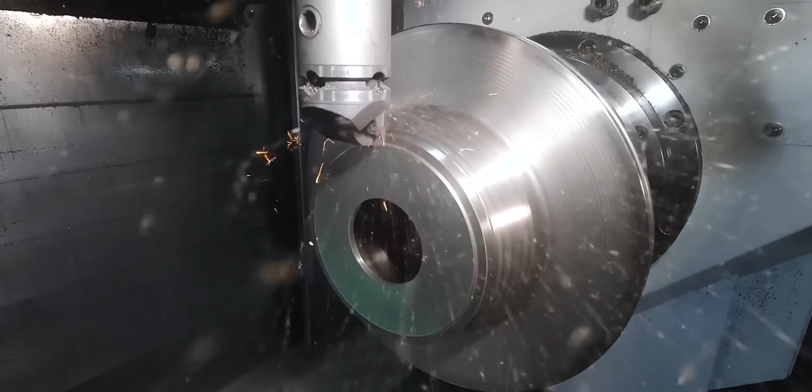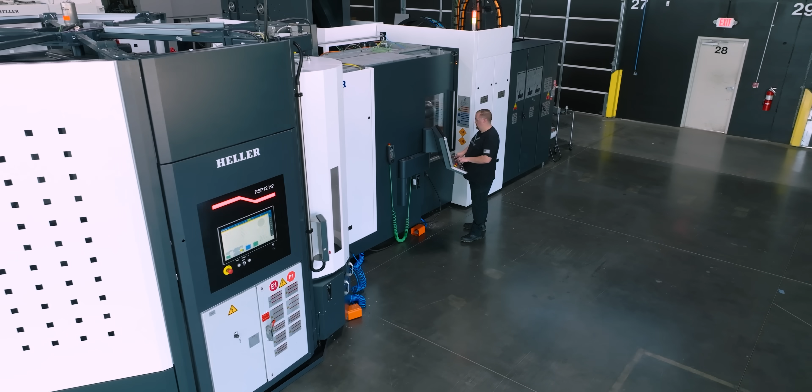When I was up there speaking, I said, who programs? And all these hands went up. And I said, not a single one of you are the same. Everyone programs based on their experience, their applications, who they've known, the type of machine they're on. Everyone's different. Therefore, if one company switched out each programmer on the same job, that cost would be different because every single person's different.

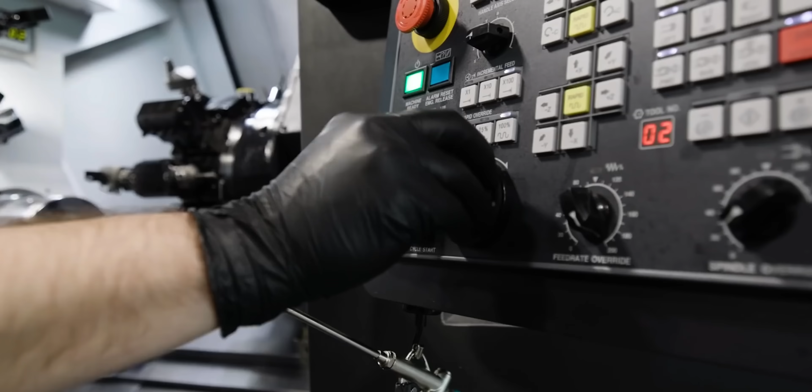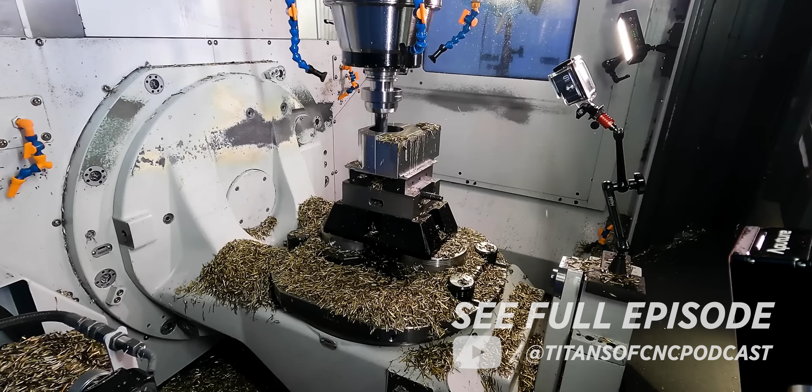So one of the biggest and most important things you have to understand as a company producing a part that matters, and you need to get time down, is who is your programmer? What is their mentality? What is their mindset? Are they striving for just being obsessed to keep perfecting the art, and keep getting better, an obsession for perfection?

That's right. You know what I mean? I love the way you say that the programmer is the one that dictates the pace of the shop, because 100%, that is so true.

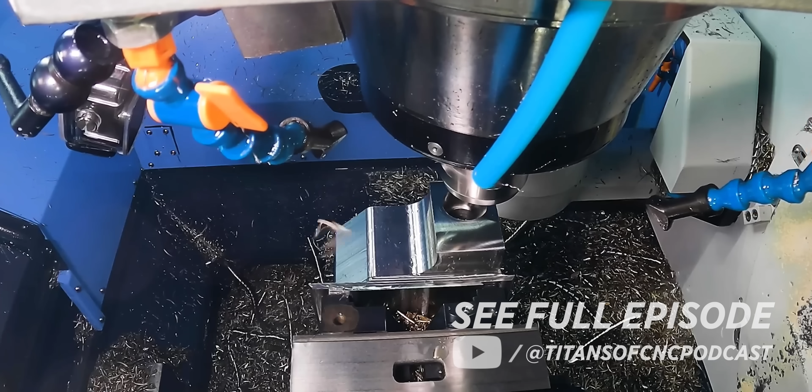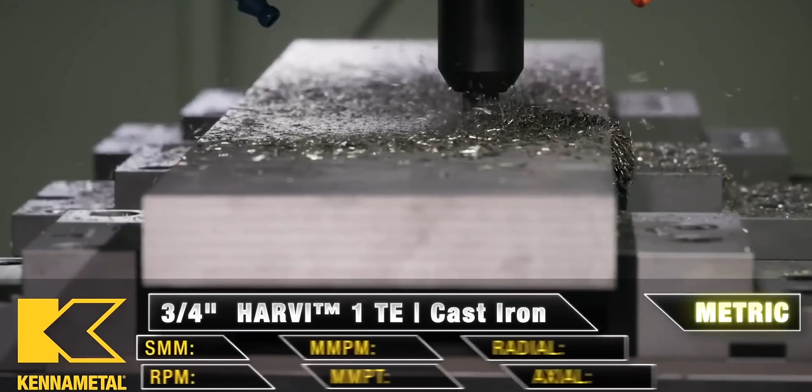Yeah, it's like if you walk onto a floor that's making a million dollars worth of product, there will always be an alpha programmer. There'll always be one guy that started there at the beginning, or gained the respect from other people, or however he got there. But that person is the one that dictates it, and other people are kind of underneath that person if there's many different programmers.

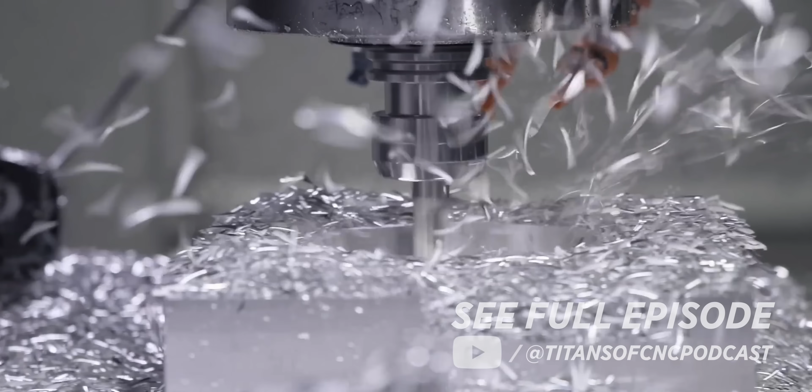And if that person is amazing, the entire floor will be amazing, so long as they have good documentation, they understand how to do standards, and everyone else kind of rises to that person's level.

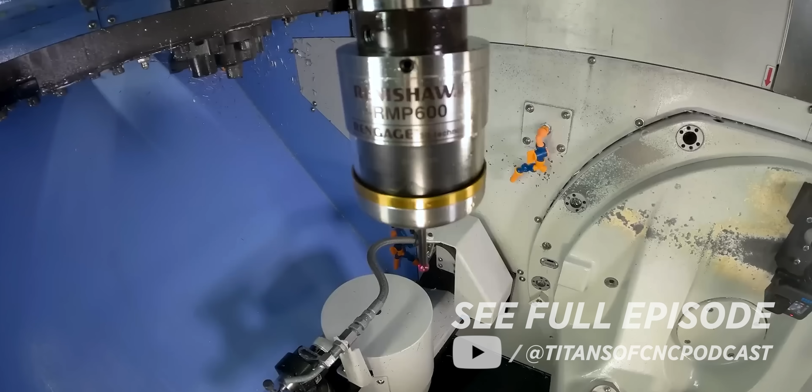But if it's like a zoo, and you have different people running different tools, the same tool in different ways, like you guys were talking about, and it's all in disarray, then you're going to have major problems. But you bring in the right person, and that person will be able to look at everything.

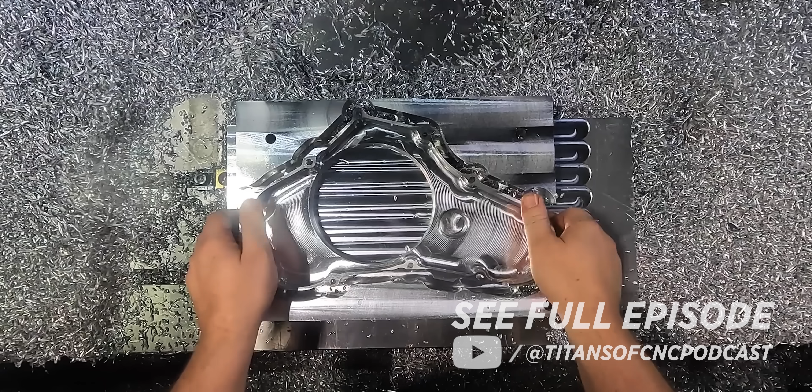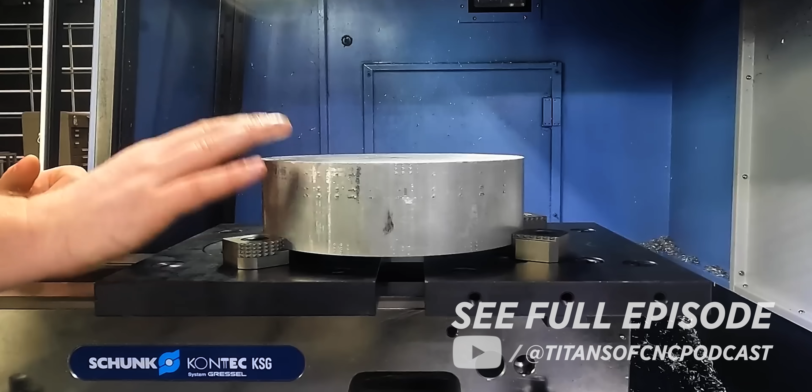By just adding certain standards, not just standards in tools, but in surface foot, chip load, depth of cut, all of it for each type of material and application, by adding these in and making it law for all programmers to do the exact same thing, or bring something that's better to make that the standard, then the entire company will rise, because the price to manufacture the parts will decrease, which gives you a better profit, which allows everybody to get paid, which the culture will get better.

It changes everything. One person. And if your head programmer does it the same way and he's not willing to change, then that person needs to be fired. I'm sorry for anybody, but I've literally gotten people fired over this.

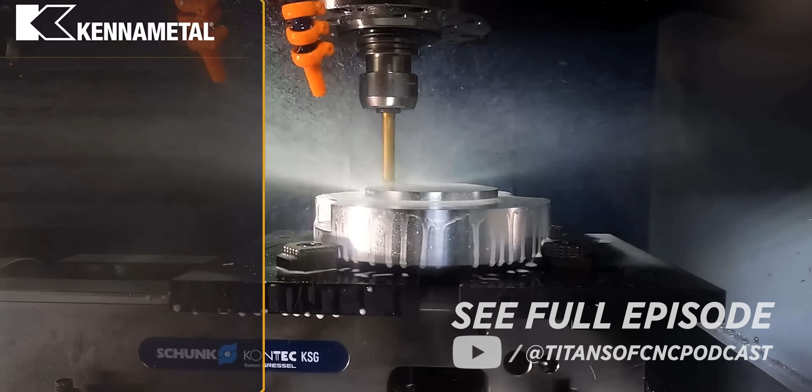You have a whole company that's staking everything on your decision making. And if you're not constantly striving to be better, if you're not a true leader and you're not bringing the heat as far as making everything flow perfectly, then you should not be in that position.

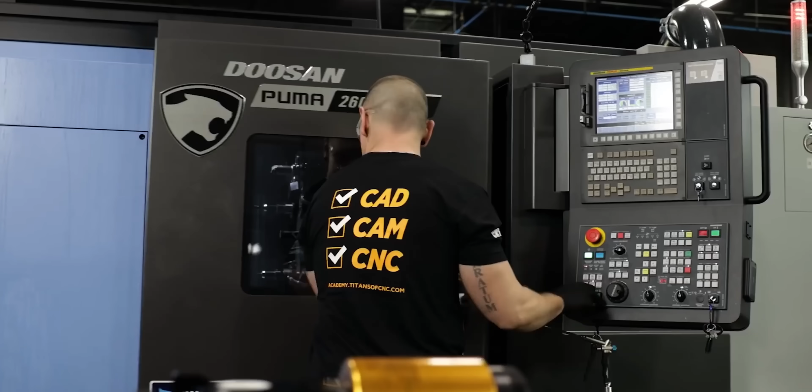So good. It's funny, it's like there's really this kind of balancing act, because you want to be consistent, you want to develop standards, you want everybody on the same page, but you also have to be able to step back, look at the situation, and be willing to innovate. Like you say, if somebody comes with a better solution, you have to be willing to look at that and perhaps give it a chance.

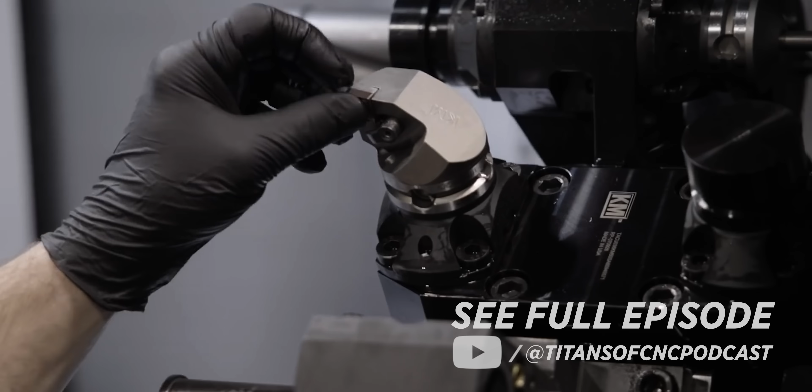You have to be willing to change at the same time. And sometimes, if a job's running forever, you don't want to just stop the machine, let it blink, and go put in the end mill right there.

That's why it's important to, after work or on a Saturday or something, throw like a little test party, and be like, hey, we're going to actually take some monster cuts, we're going to murder some material, and we're going to see what these things can do. And if we can find something better, then we will go change the original programs that are running on the machines and make that law.

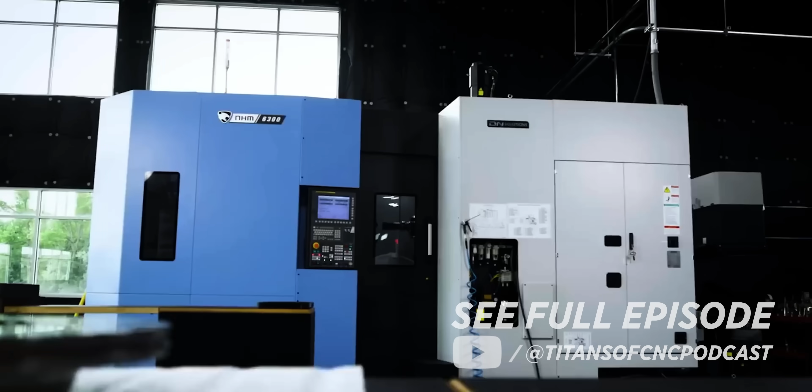And usually it'll blow your mind too, the results. I mean, think about how many tests we've done, and it's like, holy cow, we've been leaving hundreds of thousands of dollars on the table and didn't even know it.

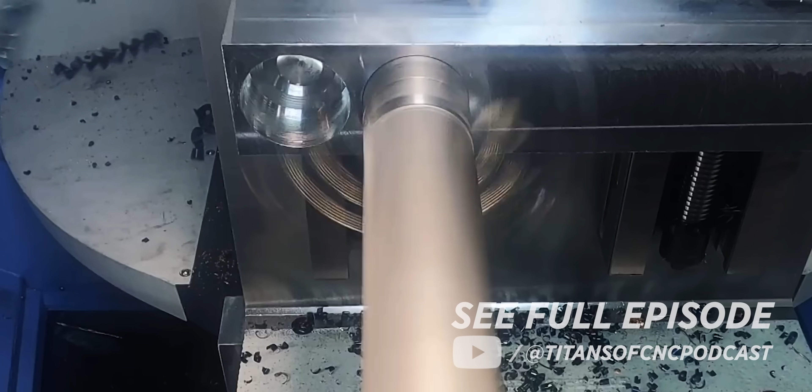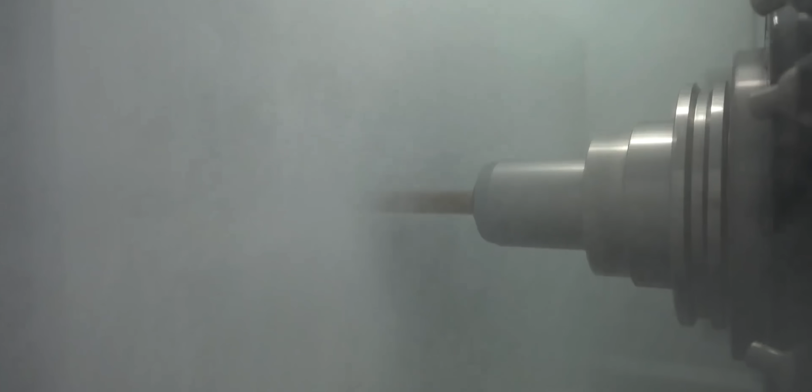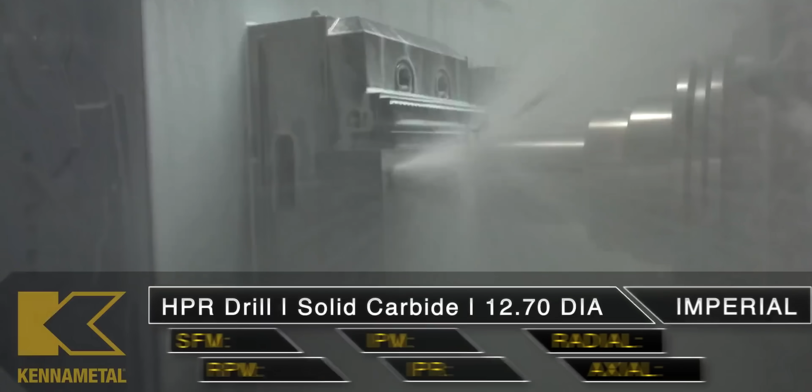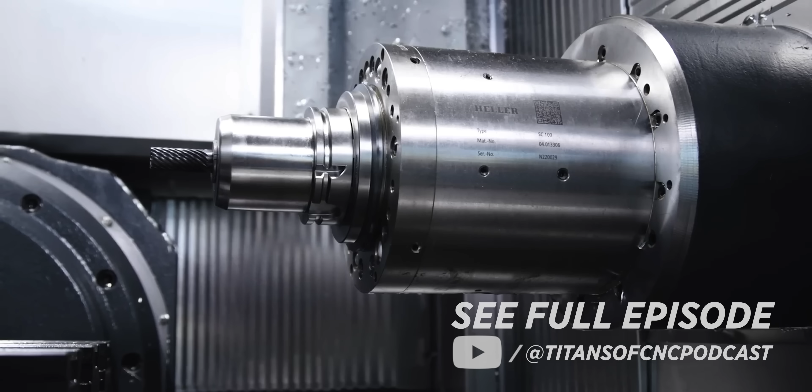And then they're just taking these small pecks and drilling so many holes, not thinking that you could actually go to one of the higher end drills that are designed to break the chips and designed for that specific material. Like Kennametal has some of these drills for steel. These things are running at like 100 to 200 inches per minute in steel. Or like us, 2,300 inches - that's on the end mill, but on the drilling, it's just like boom, you know, just murdering it.

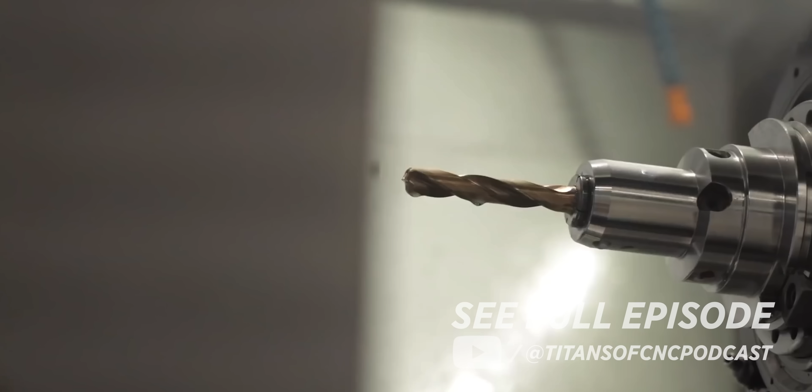I love new tooling and I love innovations, and people a lot of times don't realize how much money those things can make you if you're open-minded and you bring them in.

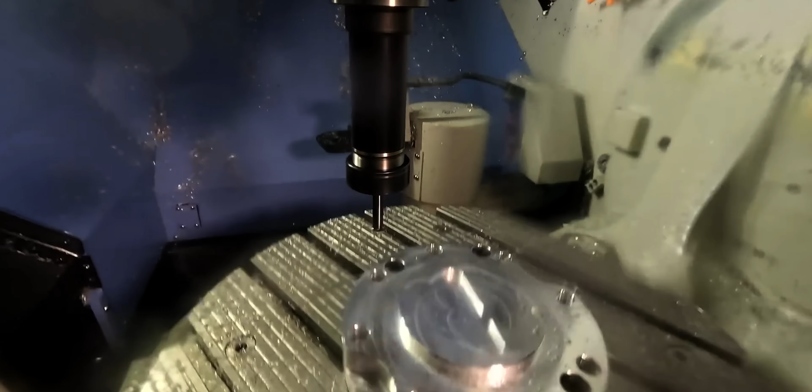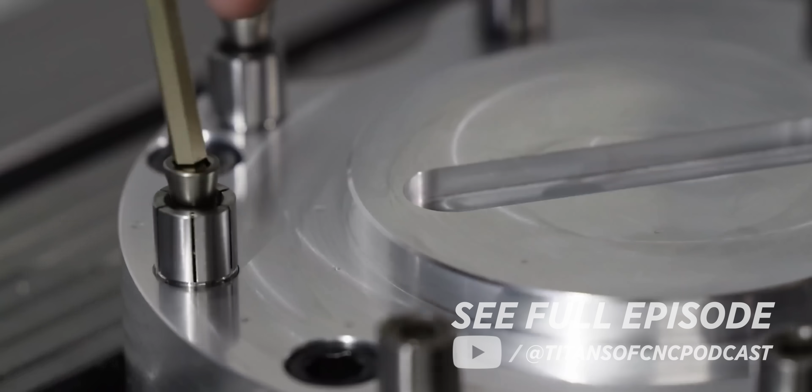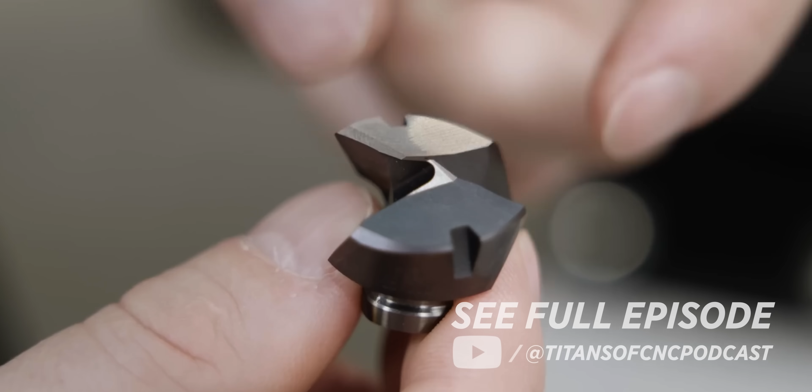Well, that's where it starts, right? Being open-minded, because I'm living proof of what you were just talking about. I'm not saying I was that alpha programmer you were talking about, but I was asked to do a process document for tight tolerance parts. So I had to write up the procedure that we do, because a lot of the parts I was getting were those tight tolerance parts, and they were generally coming out good, but we'd hand the same type of stuff to another programmer and it might be a completely different process. So I was asked to create a document, take your processes and some of the other programmers' processes, and let's create this document so every programmer follows it. Like if you're doing this tight tolerance hole with a 3-thousandths true position, this is how you do that hole.

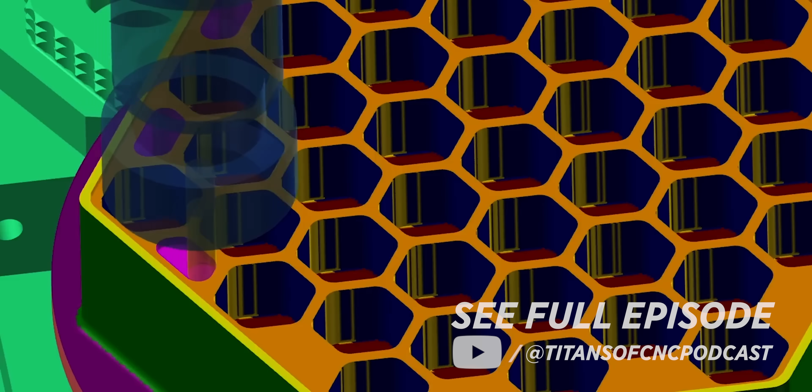And it made things so much better once we had that document in place. You can get a lot of different variants, even from your programmers, down to your setup guys. If you have a difference between your setup guys who do your tool hang-outs, fixturing and stuff like that - I had to write up several process documents for setup techs too, like on the lathes, making sure that if you hang a boring bar out a difference of 1.5 inches, that can change your entire program. It changed everything. Now your program is no good, and now we're going and changing your program when it wasn't the program at all - it was just how you set it up.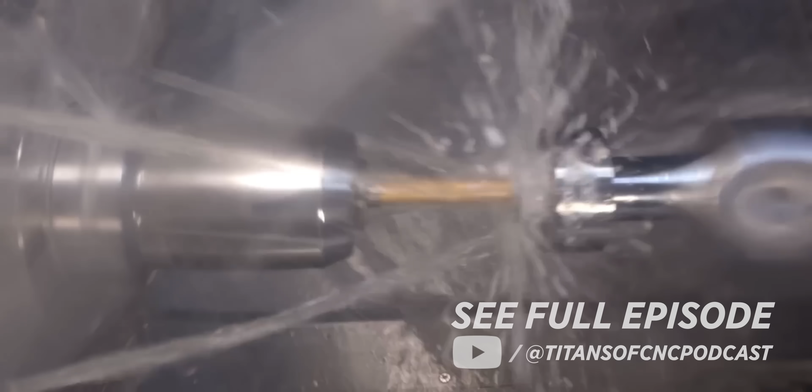So you want to see that consistency all the way down, right? From your programming to your setup to even your operators. That consistency is key, 100%. And it's not just good for the company, it's good for every machinist on the floor - they know what to expect, they know what to do. Exactly. Everybody gets in that same rhythm and groove, and you start making real money when that happens.

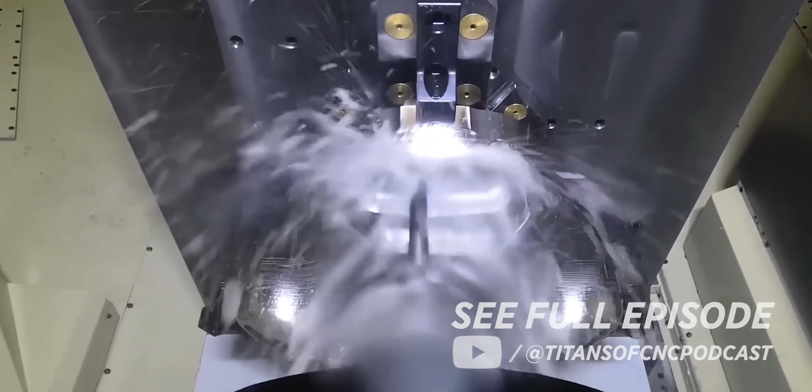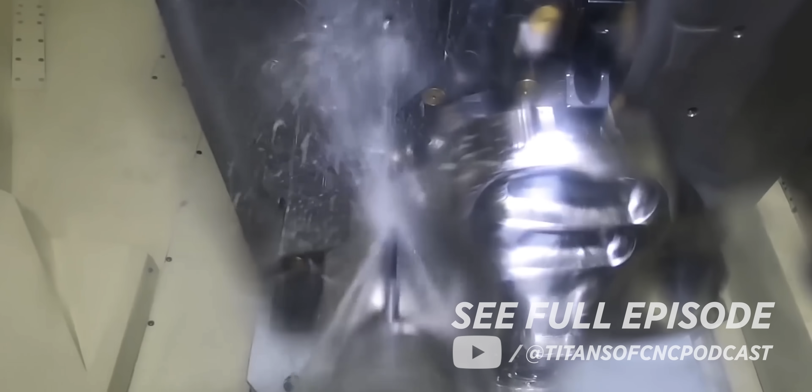So I think that running tools is something every shop should look at - figuring out your standards, figuring out how to push them, getting to that sweet spot, standardizing it, then allowing all your programmers and machinists to run off the same standard unless they have something better that is tested and proven and replaces the current standard. So when you get to that point, talking about ways shops can improve - advancing your programming techniques, your tool path techniques is everything. Your tools, your standard tools, and then looking at the different parts on your floor and standardizing certain machines.

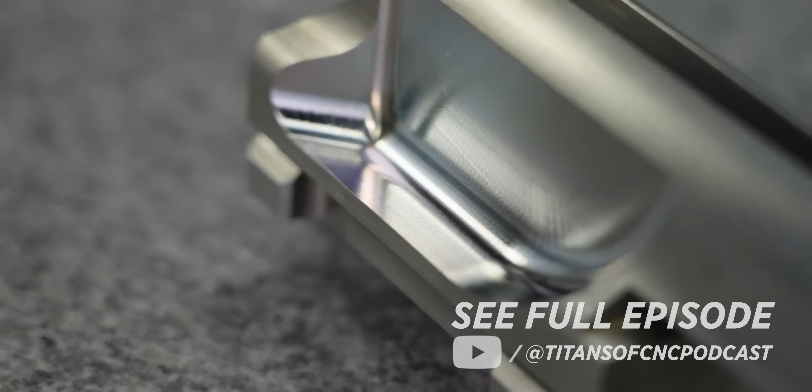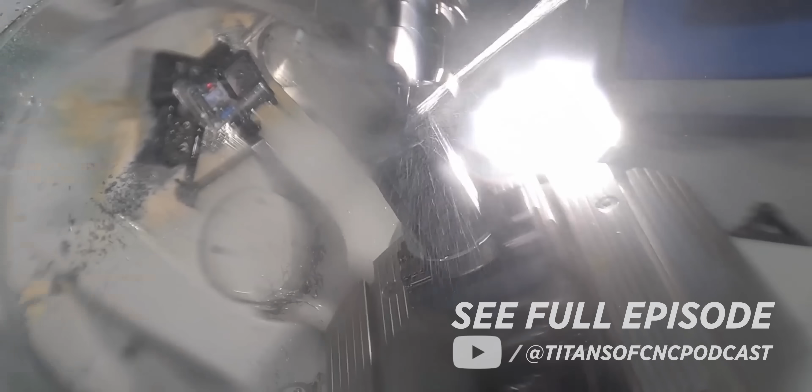If you cut a lot of steel, then you cut stainless, titanium, Inconel, and aluminum, taking those different applications and standardizing them to certain machines. So this machine is where we do all the aluminum. We don't just say it's due right now and this one's open, so we'll put it over here where we mostly run steel, and then next week it'll be over there, and the next week it's over here.

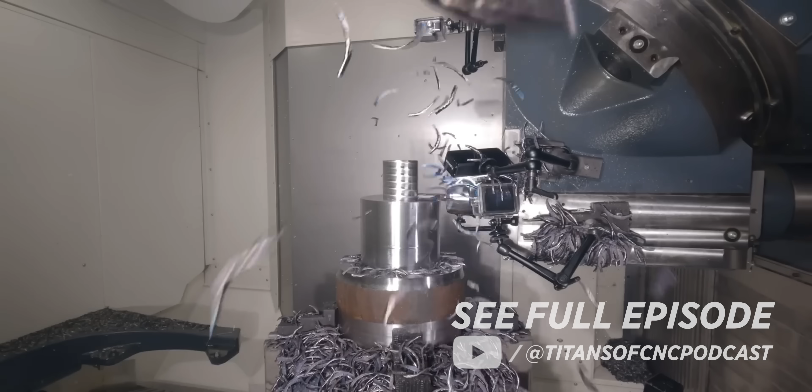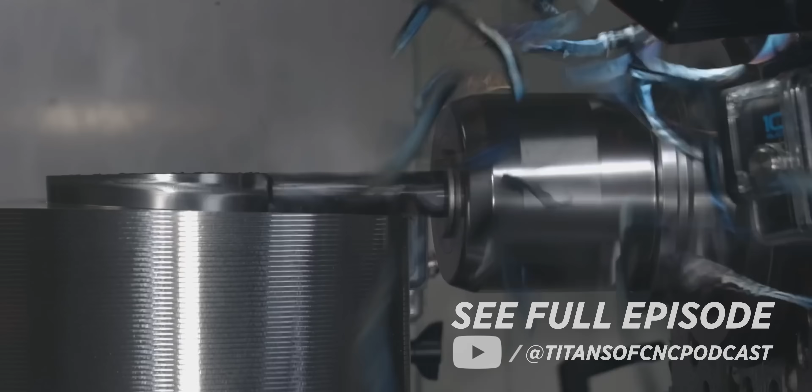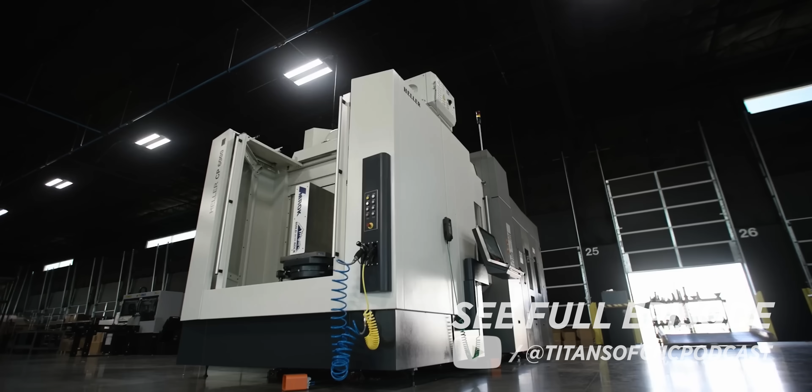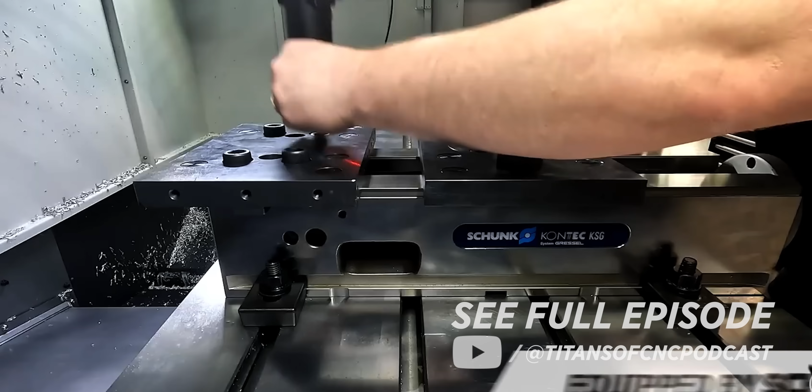Actually figuring out your scheduling so you can run most of your different materials together, and really focusing on your standard tools, like an end mill. If your sweet spot for an end mill is a 3/4, that's where you're willing to spend that money. To go bigger, you don't quite have the horsepower. It could be a 1/2 inch, and you just feel like this is the size we use the most. Standardizing the actual tool magazine or carousel so that you have those end mills in place, and you program off of those tool pockets so you can start alleviating all that setup, get rid of all that setup 100%.

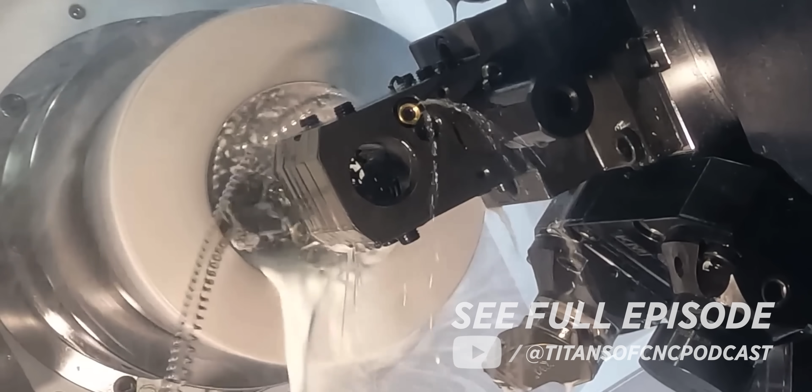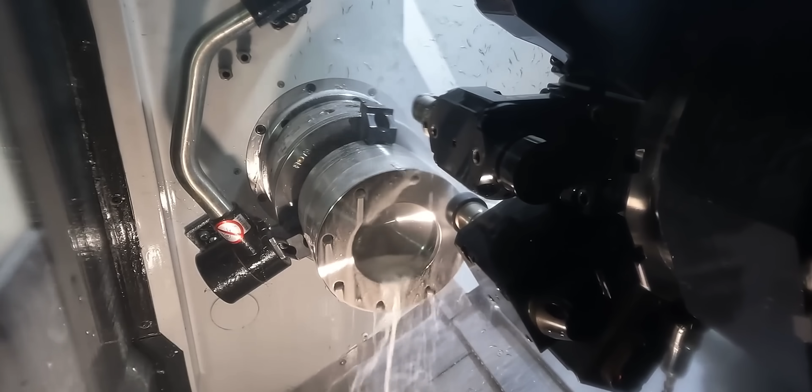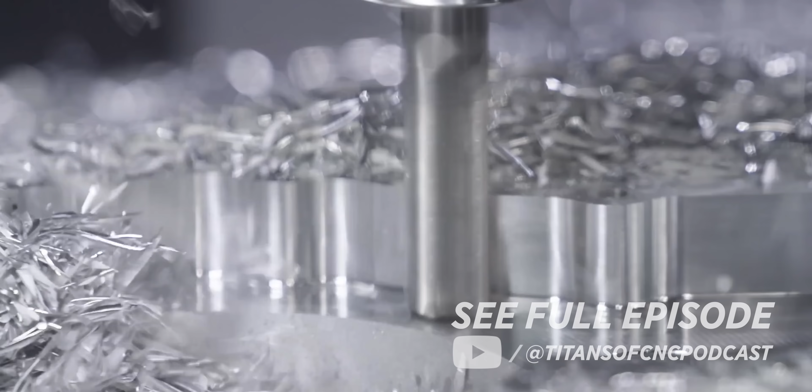Then running, like, put all the tools for stainless steel, drills and tools, and put all like parts together. When you start doing those types of things, look at these aerospace companies, and we're talking about tube fittings and different types of parts where they're so similar. They might have a few different types of ports, different tube ends or whatever. It's about getting the boring bars, the drills, and the end mills figured out into pockets where these are all end mills, and I'm going to have boring and drilling and different things, leaving them in there, because that's a huge money savings.

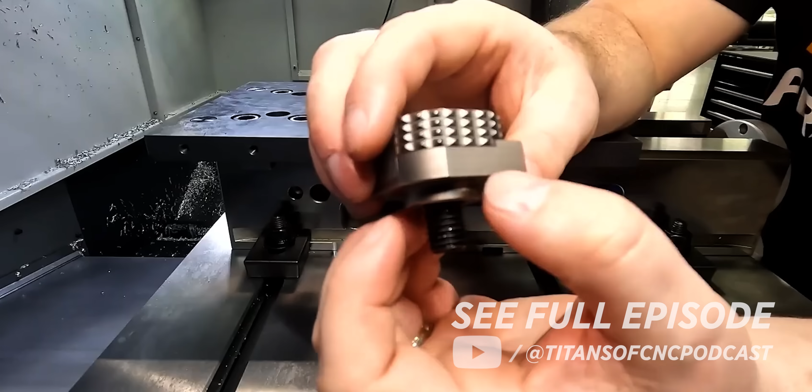Setup is what kills most shops every time, and a lot of management don't understand that. I've seen so many places where they'll give you 15 minutes for every setup, and it's like, well, no, this setup is going to take me 6 hours, or 2 days. And since they don't understand that, they have no trouble telling people, hey, pull that job off that machine.

We'll come back to it later and set up this job - easy peasy, right? Wrong. And it's like, man, it took us days to get this dialed in and everything perfect. And they're like, well, why? No setup should take longer than 15 minutes. And it's like, sorry, they do.

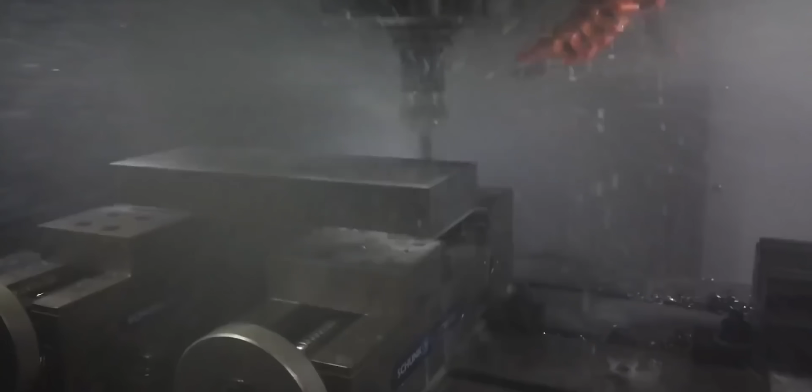So anytime you can make it to where you have even one less tool that has to be assembled, it saves a tremendous amount of time and money when extrapolated across a year. It does, over tool and setup after setup. Think about even on a lathe - if you're going from aluminum to stainless steel, you're going to be switching out all those inserts. You've got different grades, different cutting edges, and that stuff adds up.

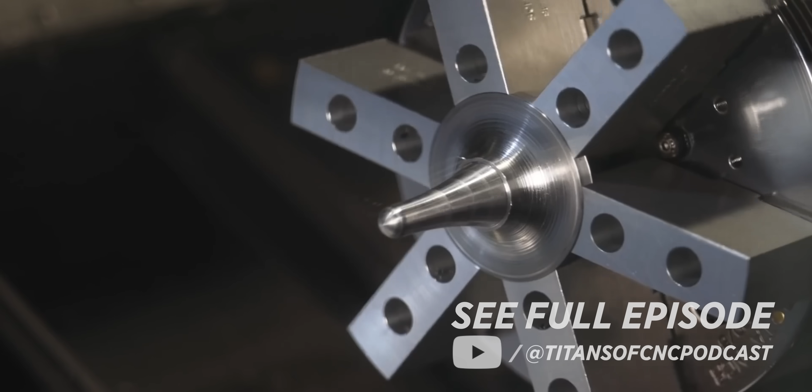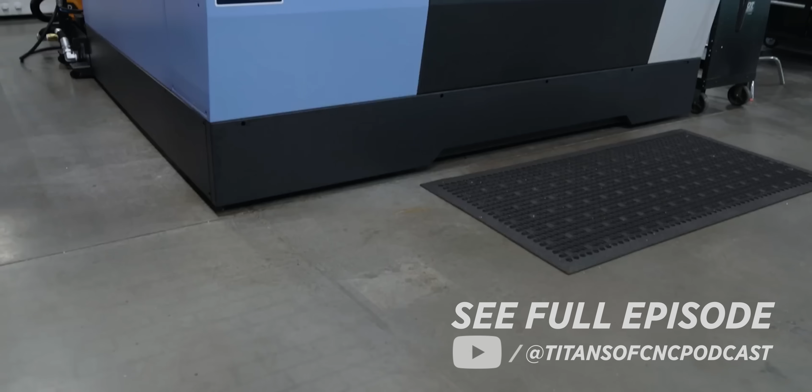Standardizing even your tool numbers is important, because right on top of all that setup, if you have a lot of programmers, I've got this programmer who just brought me the next job, and he's using the same tools, but guess what - they're all different tool numbers. Then you either have to change them all, or change my numbers, and you fat finger a number and end up crashing the machine. You forget one H2 and it's game over. And that just takes time too, over and over, job after job.

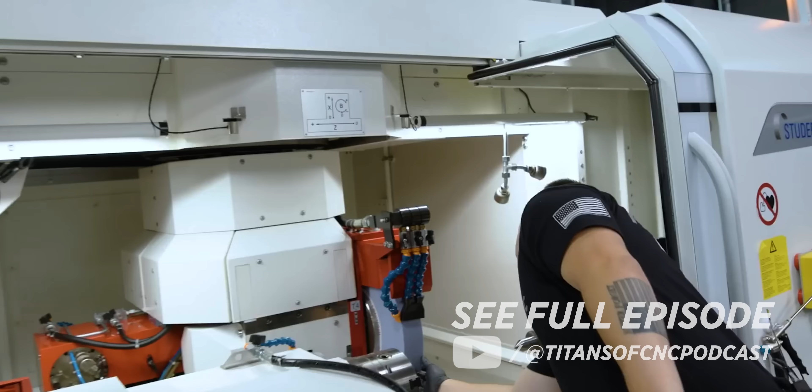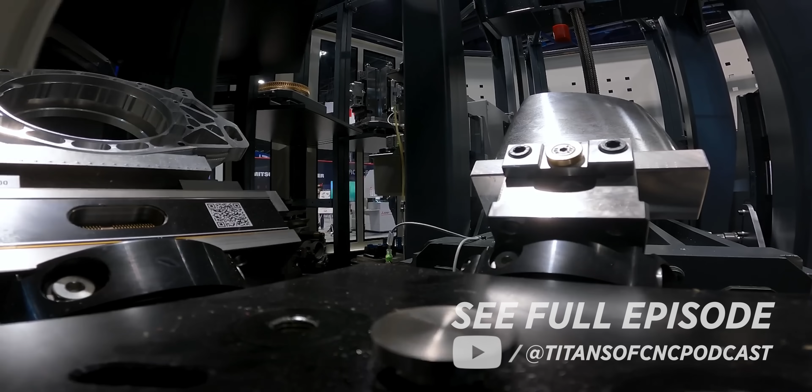I think this is a good conversation because a lot of companies are looking for ways to save money and drop costs, and they're looking at automation. 100% automation in the future of CNC machining is standard practice, and you're not going to bring the work back without truly getting it. But absolutely, we're talking about all of it.